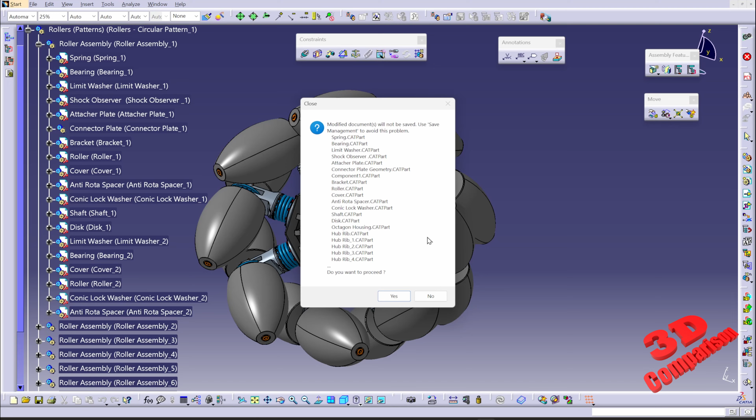We're going to see exactly how we're going to save this as a step file, and we're going to see that it will also maintain the structure. In this case, I will just close that.

Within Fusion, we will go to File, Export, and for the type, the file format will be step file. I can also give it a name, let's say Mecanum wheel with an underline. I'm going to hit export, and we're going to see that the file is ready.

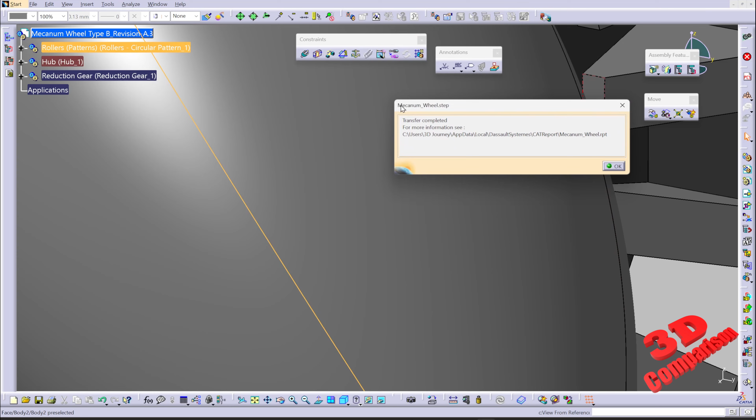Within CATIA, all we have to do is drag and drop. This is the file that was just created. I'm going to drag and drop it within an empty scene, and we're going to see the following. We have the information for the transfer completed. I'm going to hit OK.

If I'm going to zoom out, we're going to have the model. This is really important if you are using the file format as step, because this will also maintain the graphic properties.

We see that the springs will remain blue as they were within Fusion. We're going to see this section that will be orange, and that has also been kept. So keep in mind that the file format for step will also transfer color.

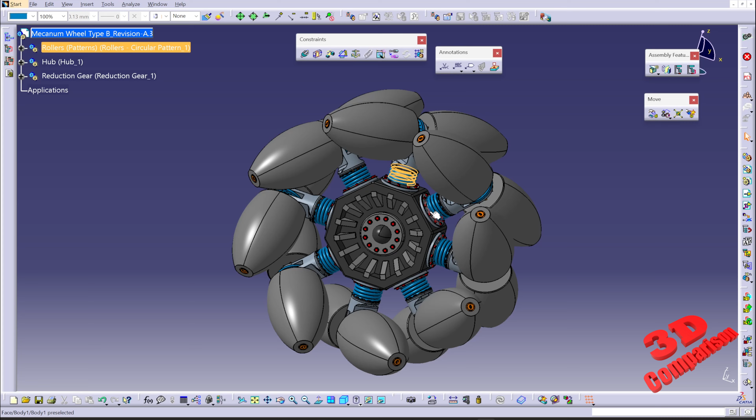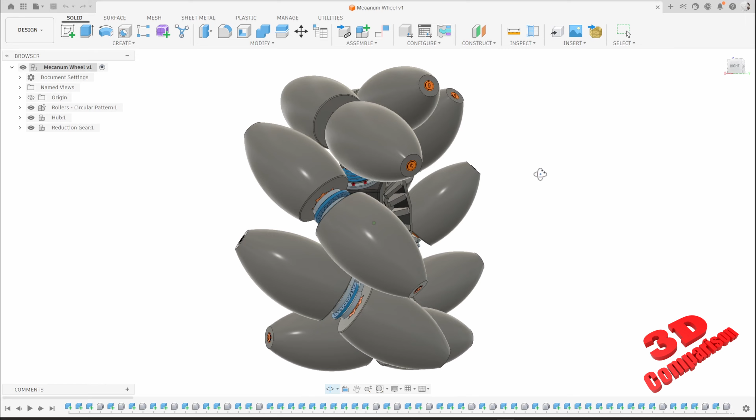Also, if I go on this roller with the measure tool, I want to measure this circle. We're going to see that the radius will be 68.103 millimeters. If I jump over here and do the inspect, the measure for that one, we're going to see that the same radius is also present. So this will also maintain the exact proportion of the model.

If you take a look, we have the following assembly that will have within it the following roller that has also been patterned circular. So the same structure has also been maintained.

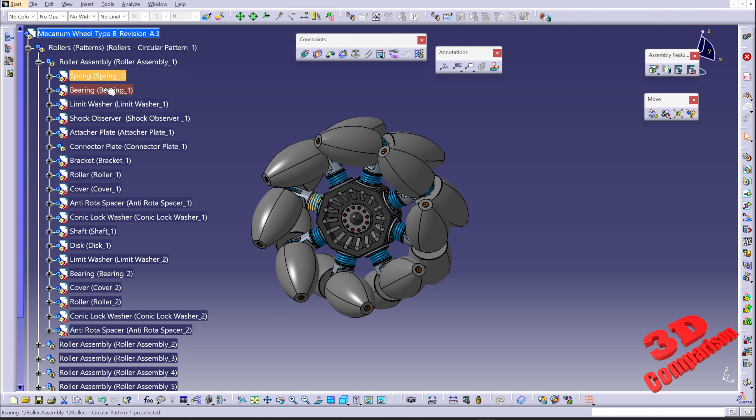We have the roller. If I expand that, we're going to see those 8 pattern rollers. In each one of those, you're going to have the components: the spring, the bearing, the shaft, the bearing again, the roller, and the conic lock washer, which is the orange one at the end.

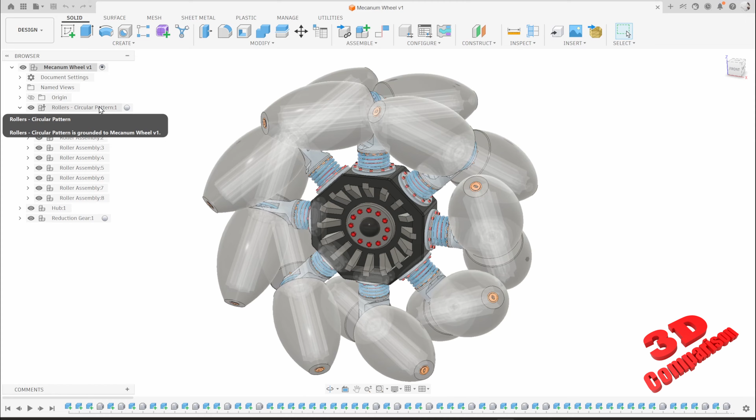The main difference is that in this case, the step file will have all of those rollers defined as individual components, while within Fusion, Fusion has the possibility to pattern those. So we have the first one, and we're going to have the structure for the other pattern assemblies. They are all nested underneath the roller circular pattern, and that is exactly how it has been exported as well.

The other components will be the hub and the reduction gear in the middle, and again the same will be within Fusion. So this is the main advantage of a CAD solution.

If you are using a step file, we can transfer those from various software. In this case, we transfer from Fusion to CATIA, but we can take it to any other CAD solution, and it will still maintain the same properties in terms of geometrical shape and accuracy, so the dimensions. Also in terms of visual elements, we see that the colors have been transferred, and most importantly, we're going to have the same hierarchy within the product, just as within the software it was created in.